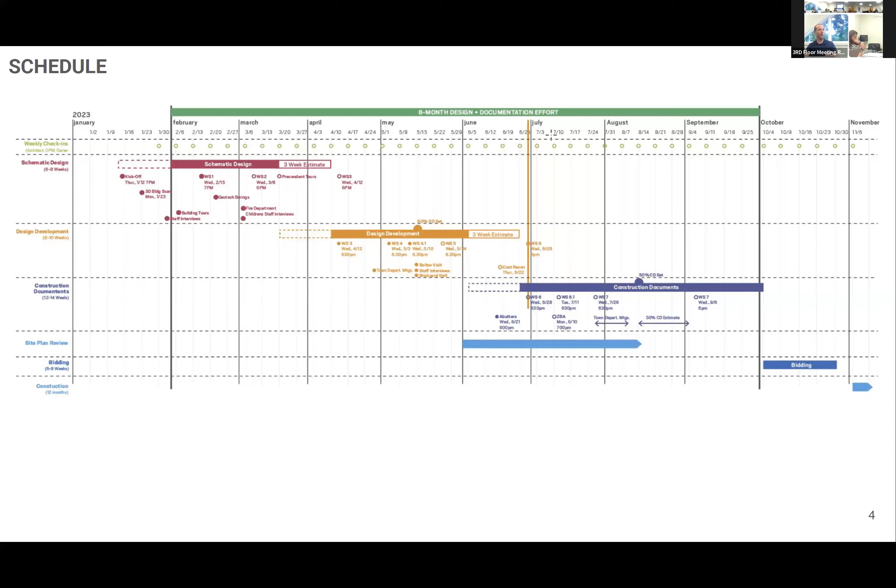And as you can see where that orange line is, the vertical line just at the end of June here, we're shifting gears into construction documents, which we have through September with a preparation for a bid package following that. So here's a bit more of a detailed view of what we're up to and what we have been up to.

So we just worked through that 3-week estimating period coming off of design development. Last Thursday, we had a reconciliation meeting. So the big difference in our process now is we have 2 cost estimators. We have the cost estimator that is part of the design team that did the SD estimate with us. But then John, representing the owner, the town has hired a third-party estimator. So now we have kind of 2 estimator sets of eyes looking at the project, and we went through the reconciliation process last Thursday to get all of them aligned on the estimated costs.

We also last week had a meeting with the abutters, property owners. Didn't get a huge showing, just a very nice couple from across Library Hill Road joined us in the library, but that meeting, it was broadcasted to a larger group of abutters. We only had a couple show up, but that was in preparation for our ZBA meeting that should say July 10th, not June 10th, but that's in a couple weeks, in a couple Mondays. We're going to be going in front of the Zoning Board of Appeals, which I'll talk about more here in a minute.

We are proposing an additional workshop to our CD process. That's workshop 6.1 that you see up there. We're proposing that for Wednesday, July 12th. And that is largely in response to this budget issue that we have to work through. Workshop 7 should already be on everybody's calendars. That's been on the books for a while.

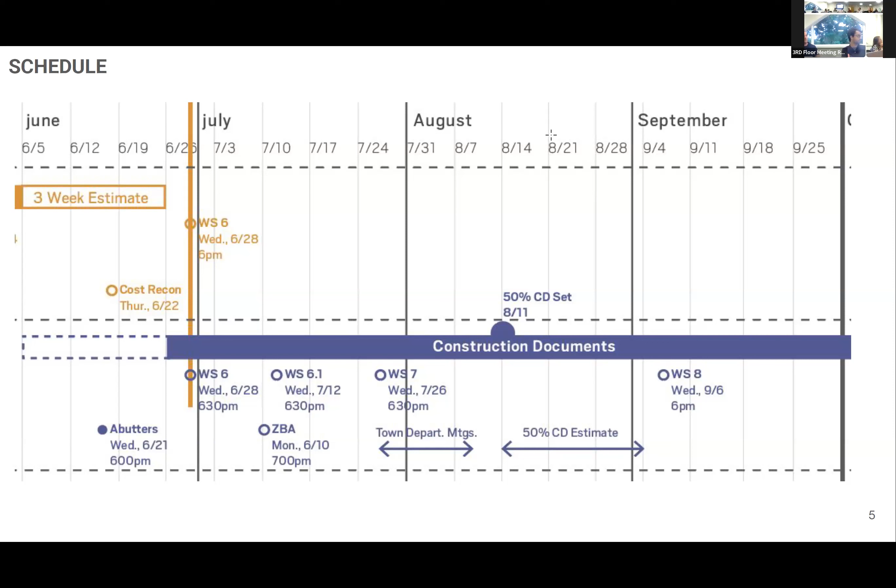We're going to be going back to the town departments to kind of review where we're at before we issue our last set of drawings for estimate August 11th. So then we'll go through one more estimating period to set us up for the final push of CDs. So that's our process in a nutshell, and we'll kind of revisit this at the end of the meeting to talk about it in a little bit more detail.

Just a quick summary of the ZBA application package that we pulled together. We submitted it about 2 weeks ago in preparation for this July 10th meeting. And the big takeaways are that we're applying for both a special permit because the current site and building are non-conforming to the zoning type of use. It's zoned as a residential part of town, and obviously it's not a residential building.

And the existing footprint of the building, which you see in those red dash lines, is not conforming with the setback requirements of the residential zoning district. So that's one part of what we're putting in front of the ZBA. And then the second part is that the addition that we're proposing is also non-conforming to setback requirements. So we need to seek a variance.

So what you see on screen, you can obviously see the sort of irregular shape of our site. The green lines indicate the setback requirements. One of the tricky things about the site is that we're on 3 roads, so there's 3 front yards, which have greater setbacks. And then the side yard is kind of on the top there. And then that bit in the middle that's kind of crosshatched, that's the actual buildable area of the site per the zoning requirements. The red outline is what's there now, and the blue line is what we're proposing.

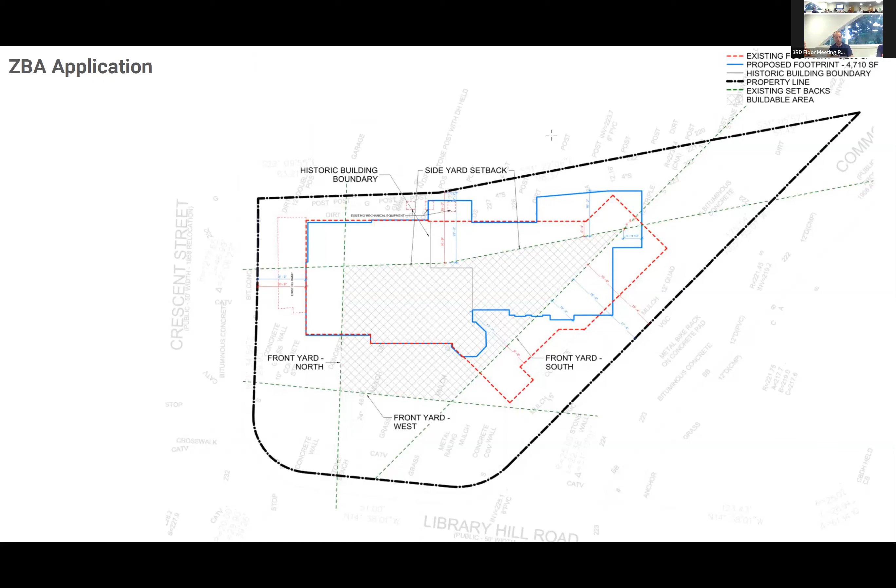So from there, I'll talk through a few slides to set up the exterior summary and updates, and then Audrey will walk through that in more detail, and Andrew's going to take us through the interior summary. And then I'll come back and talk about where we are from a cost perspective.

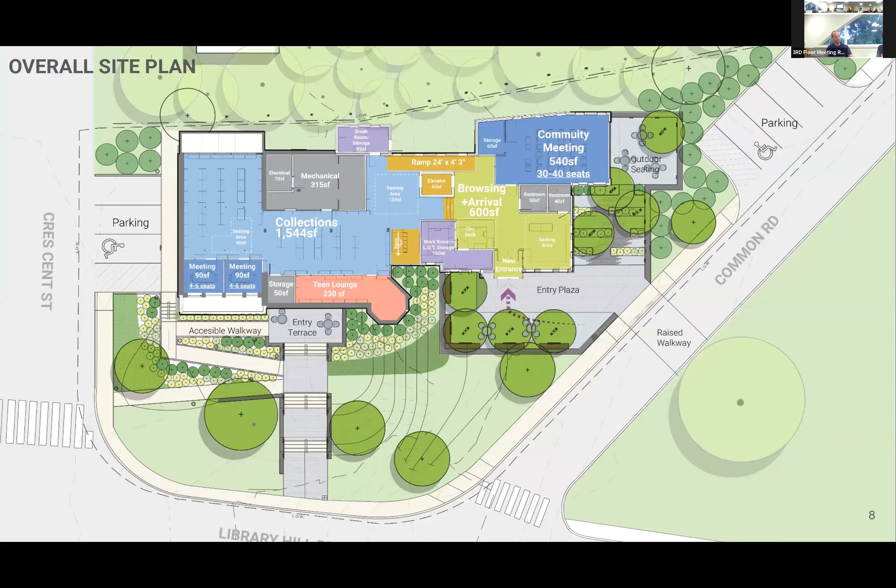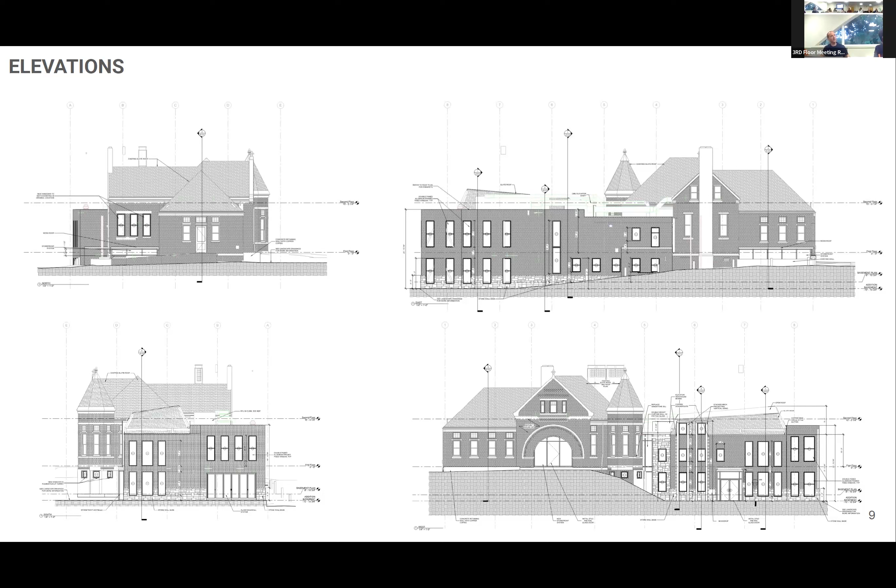So this should look pretty familiar, just an overall summary of the site and the first level design. This is exactly from the design development last workshop we had with you. Nothing of change here. Just for everybody's reference, there's a whole other side of our process where we're developing drawings for estimating and for the CD package ultimately and going to bid. This is a reflection of what those look like, but we did start to incorporate some modest updates that we'll talk about here in more detail.

Of course, you've seen this slide dozens of times, it probably feels like at this point, but it's always important to remember what it is we're working with and where we've been. And this is a summary of where we landed at DD in our last workshop 5. And this is what's reflected in the DD drawings that I just showed that were estimated.

So one thing that we want to talk about tonight is, we've reflected on this a lot internally, and we're very excited about where we landed and the combination of stone and masonry and the form of the roof. But we've talked a lot internally about the tone of the brick as it relates to Randall's brick, which I'll just click back. Randall has a very specific red tone brick itself, and we're very conscientious of that.

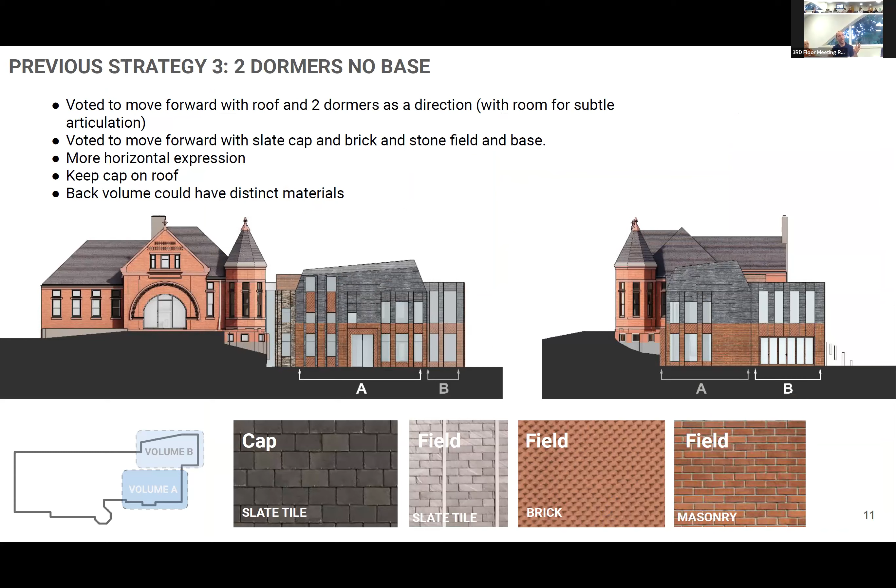And we want to be very strategic in that we don't want our proposed brick to feel too close to that red brick and perhaps clash with it in a way that wouldn't be appealing, or even worst case scenario look like a bad match, right? We're not going to be able to match that brick in any way, and we want our brick to be distinct from that. So we are proposing tonight a recommendation.

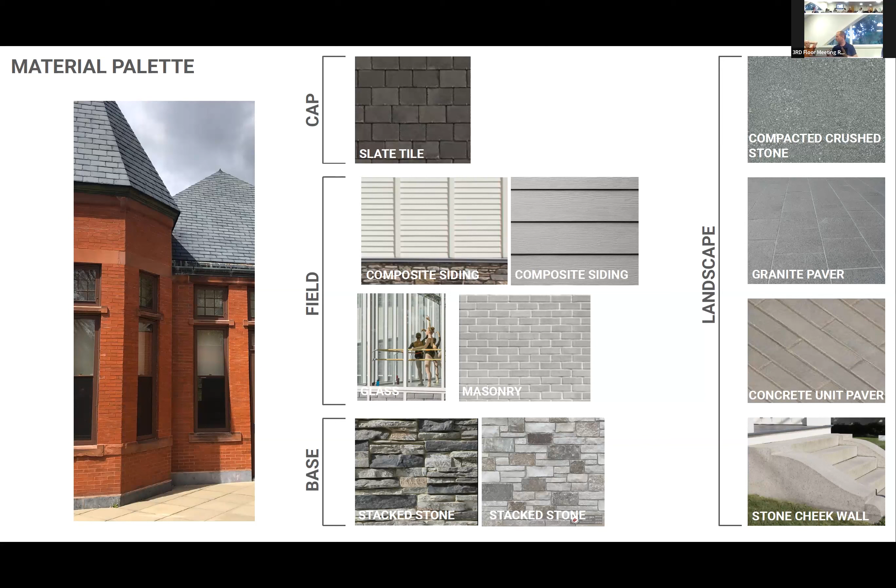It's a slight departure from where we were, but that's to consider a lighter toned gray brick as a distinct difference from the red. We've evaluated this a lot internally, and we think there's a better opportunity to complement Randall without being in the same family of reds.

Is it the color of your water bottle? Similar, just trying to get a sense. Similar, yeah, stay tuned, you'll see here in a moment.

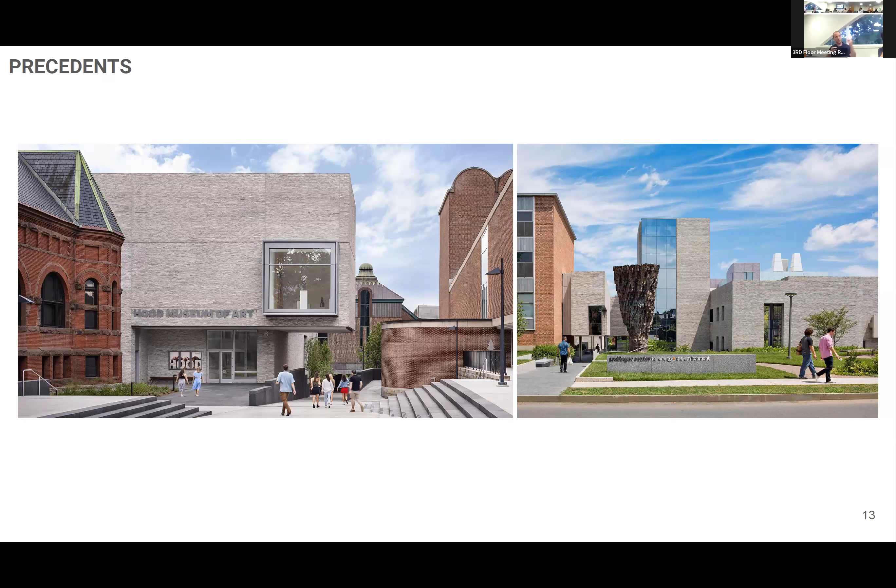The image on the left feels kind of familiar. It's up in Dartmouth, but that's a Richardsonian building on the left. It's a little bit more rusticated in its detailing than Randall. There's a bit more to it in terms of masonry variation and the amount of sandstone, but it's very much in character with Randall and of that era. And then there's a new addition to it in that gray brick.

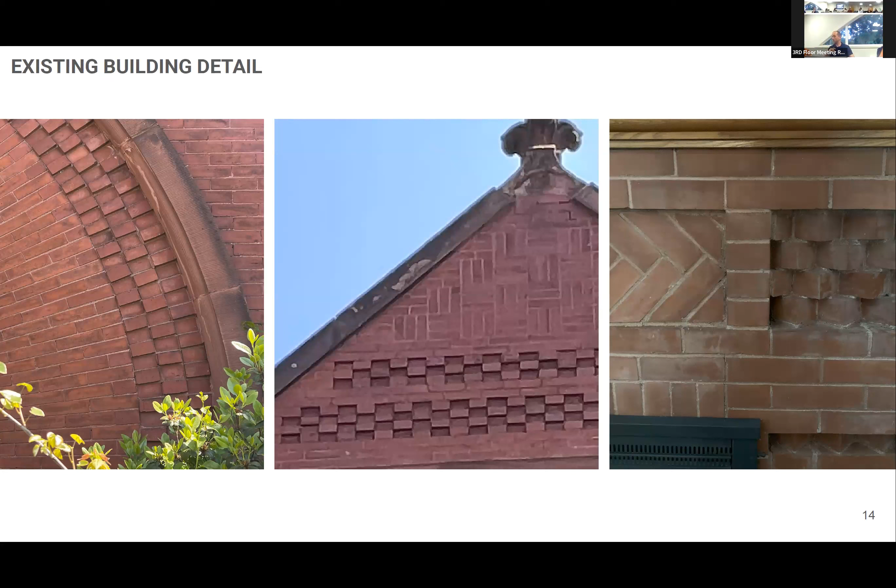We also have looked a lot more critically at Randall itself and its detailing. If you're standing far away and not looking at the building that critically, you might overlook the types of brick coursing that exist. But it's interesting. There's these little protruding brick moments. There's a basket weave moment that you see up at the top of the gable there in that middle photo. And then even inside with the fireplace, there's different types of brick coursing that was added. So we're intrigued with that and want to incorporate that into our thinking.

And so off of that, we really have been thinking more of how we can play with the detailing of the brick. And so here are a few precedents. I think you might have seen them before, of just different patterns and detailing that we could incorporate into the building to add a little bit more texture to the exterior.

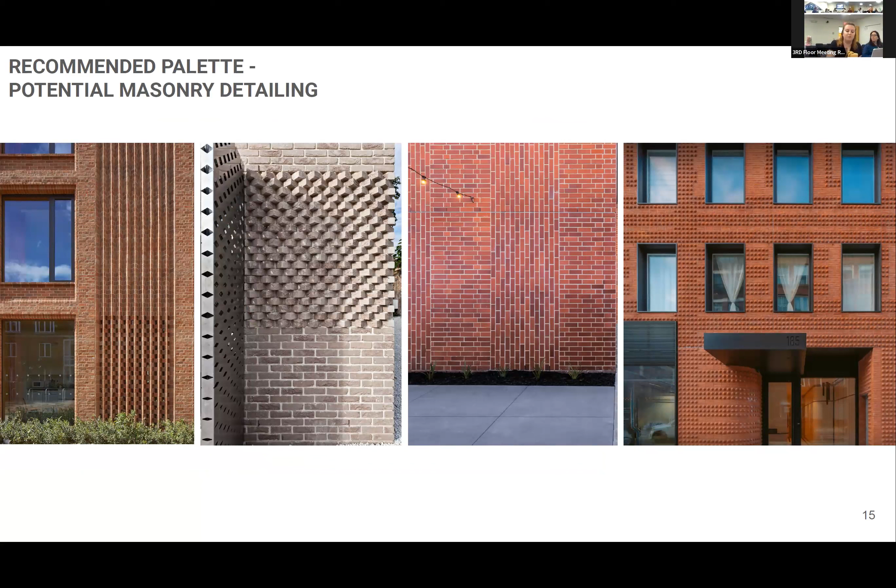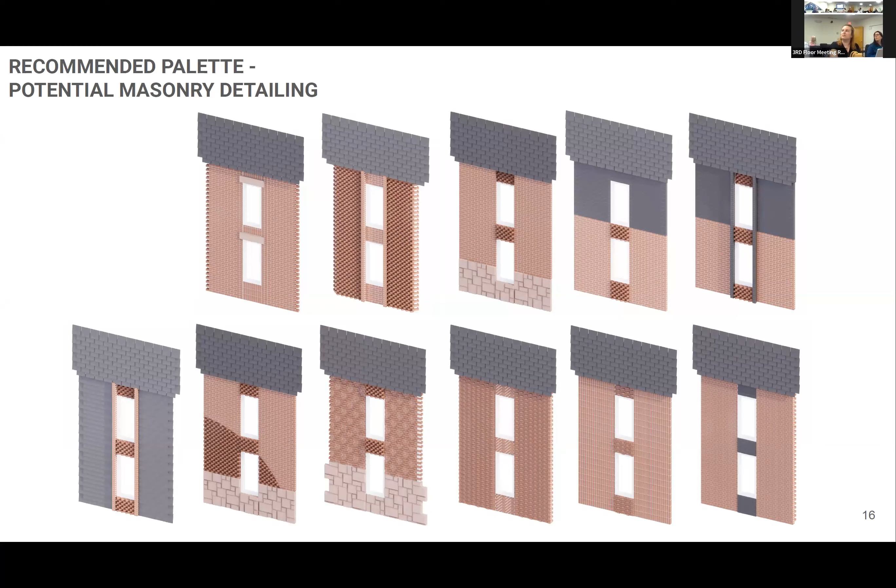And then these are a bunch of studies that we had done previously to look at all of these different patterns and how they can work together with the different materials that we're considering for the exterior. And so this is kind of where we've settled at the moment. These are snippets off of the overall elevations that we'll show in a few slides.

But we're really looking at how the different materials start to connect together and where we start to use those to create a little bit more impact on the vertical rhythm. And so it's sort of subtle, but you're starting to see it between the windows, in the vertical bands, just the opportunity that instead of a standard running bond of brick, we may introduce this sort of protruding detail to get a little bit more shadow, or this herringbone pattern, sort of riffing off what exists in Randall now and presenting it in the new composition. And all of these details are ones that we found within the original building, every single one.

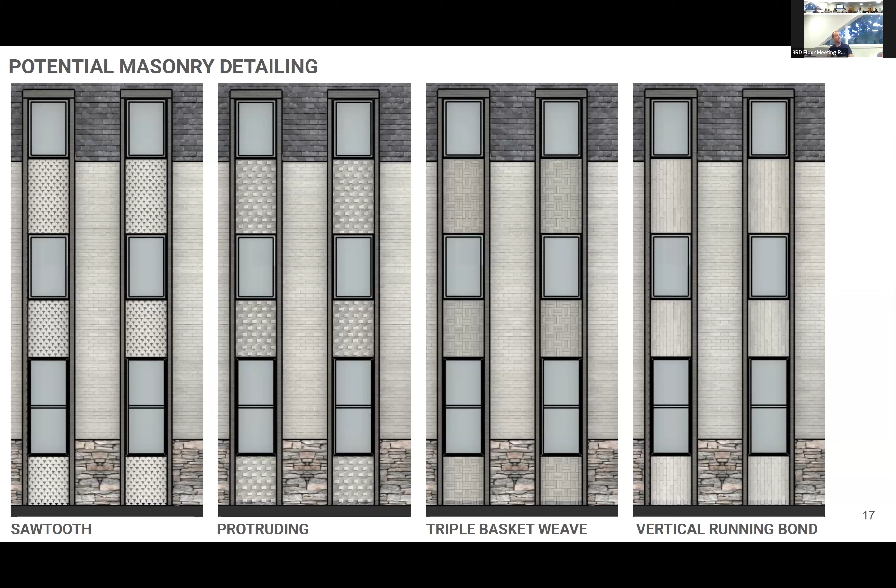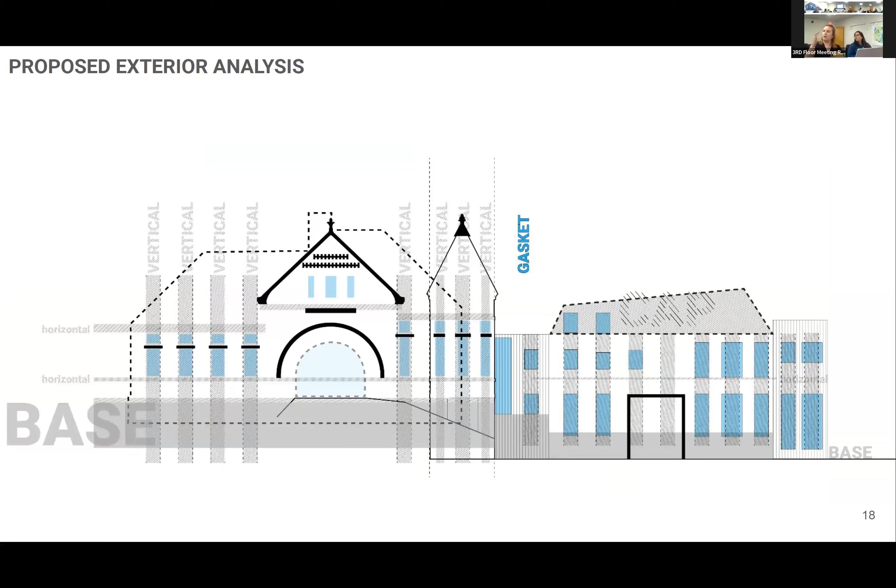And so this is just our updated exterior analysis that's really starting to show what the vertical rhythm is and how we're following off of the existing building. And then these are the updated elevations. Some of the things that we really try to focus on is creating a separation between the community room volume, so volume B, and as it is pushed back, we wanted to find a way to further that change. So we're looking at a change in tone and material as well. Whereas the front volume A will be more masonry to talk with the existing building, the back could be some form of wood or composite siding.

And just to chime in there. Obviously this is different than where we landed on DD, but the idea of the stone base and the slate roof are consistent, and we've just really looked at that field and where the transition is from stone to masonry and then to slate differently, and are introducing that lighter tone. And it's our opinion and our recommendation that this is much more complementary to the original building than trying to introduce a red tone that may feel like it's competing with it and clashing with it.

And it is in reaction to some things that we heard, because in the DD scheme, we had some of the slate turning down the vertical face, and some people expressed that that might feel a little too dark, a little too heavy. So we were reacting to that. And then there were other comments about, can that secondary volume, the community room volume, feel distinct from the primary volume, in character of course, but feel different.

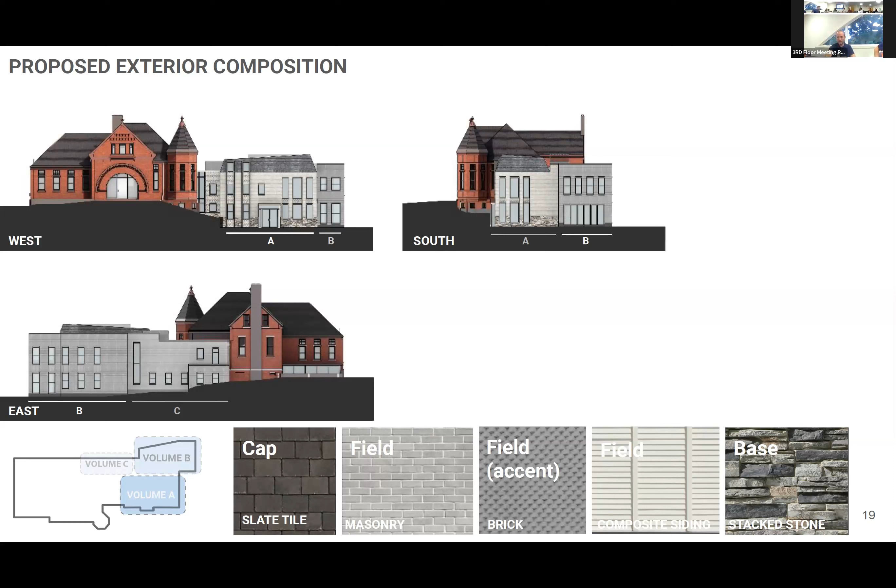So that's why, as Audrey just said, we're thinking about that in a different cladding, and we are, with our estimators' input, looking at more economical solutions for that volume. It's going to be coming back into the conversation shortly when we start talking about cost. But we need to find opportunities to manage costs. So thinking about cladding that secondary volume differently is part of our thinking. So we'll click through these in a little bit more detail for you guys, so you can see them bigger.

But here you can see the west elevation. And another comment that we're reacting to, I think it might have been you, Richard, or Andrew. In some of our DD schemes at our last workshop, there were comments that maybe we're trying to do too much, and the elevations felt a little too busy. So we tried to simplify that. The stone base has come down and is simpler. The hat, if you will, of the slate roof is now distinct from the building itself, and overall we've really tried to streamline the composition.

So you can see in this image where those details are coming out a little bit. They're expressing the horizontality within that double height space a bit more to break up the verticality, which is another comment we heard. And we're carrying that detail over to in between all of the windows where they are expressed in a uniform vertical manner. And then that carries over into the gasket a little bit as well. And that detail swells a little bit, which I find very nice. And as we go around the different sides of the building, we're really trying to keep the same language that we've started in the west face, the front face.

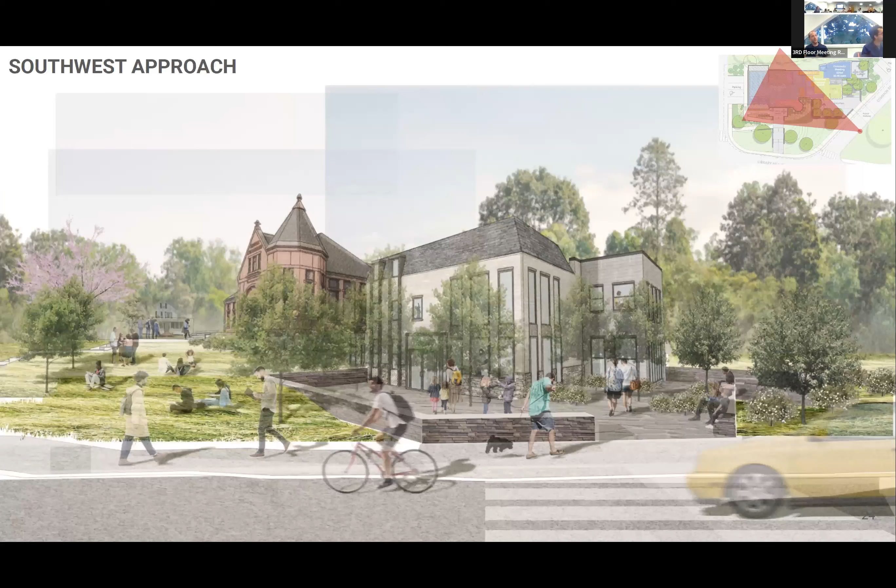So going to 3D here, volumetrically, in terms of the window composition, it should feel exactly the way it was at DD. We are thinking about massaging the roof a little bit to try to make that as economical as we can. We'll be talking about that in a minute, but otherwise it should feel very familiar. And we wanted to show that previous image, a little bit zoomed out, to help locate everybody. That box on the left is the old firehouse building, and that box behind the library is the house that we had been discussing in the previous meeting. We wanted to get that context in there, but then zoom in. So you're able to really see the difference between the volumes here. And this is just a look at those elevations in perspective.

I have some hands. I have to control this for a minute. So Morgan, raise your hand. Morgan, do you have something you'd like to say? Yeah, I just have a question, maybe this is a silly question. Can you hear me? Go ahead, Morgan. Let's see if we can hear you. Hang on one second. I can hear you, Morgan. I don't think they can hear you in here. There you go. Better? Yeah, go ahead. Now we can hear you.

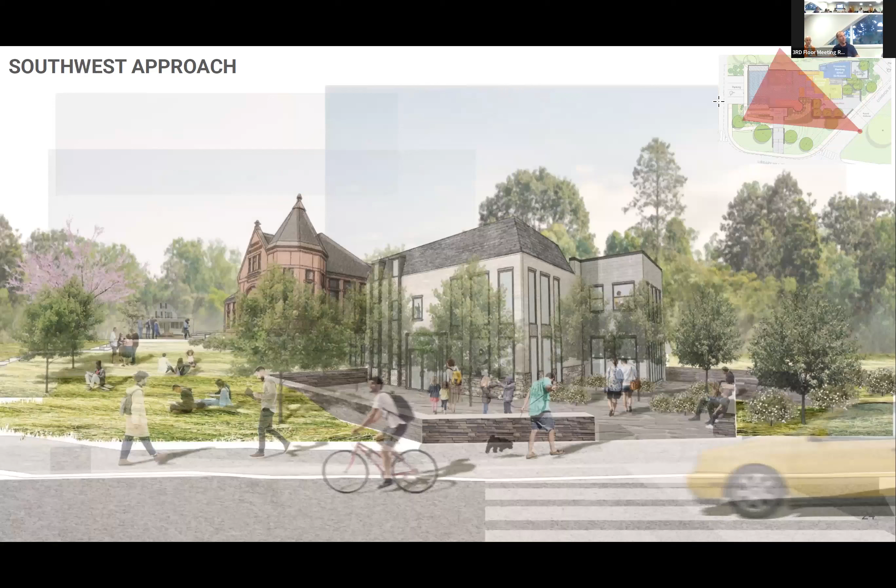So just to click back and forth, we're much more over to the right now, focused more directly at the community room, and then the back abutting property line. At the portion of the dumpsters, if you will. Yeah, you're kind of standing where the dumpsters are now. Yep.

And do you plan to have any of these, and we can talk about this, but for the ZBA, will you be showing some of these graphics? We can, I think let's talk about it at the end of the meeting about what we feel comfortable with and what we think is appropriate, but we totally can, if that helps paint the picture.

You're also seeing here very far in the distance on the right-hand side that little addition component that is our thorn in our side, trying to get that additional mechanical space we need for the sprinkler system. We're trying to eliminate it and make it all fit inside, but we're really struggling with that.

And that is reflected in the footprint diagrams. I didn't point it out, but in terms of what's been submitted to the ZBA, that little bump out is represented in what's been shared. So they're aware of that.

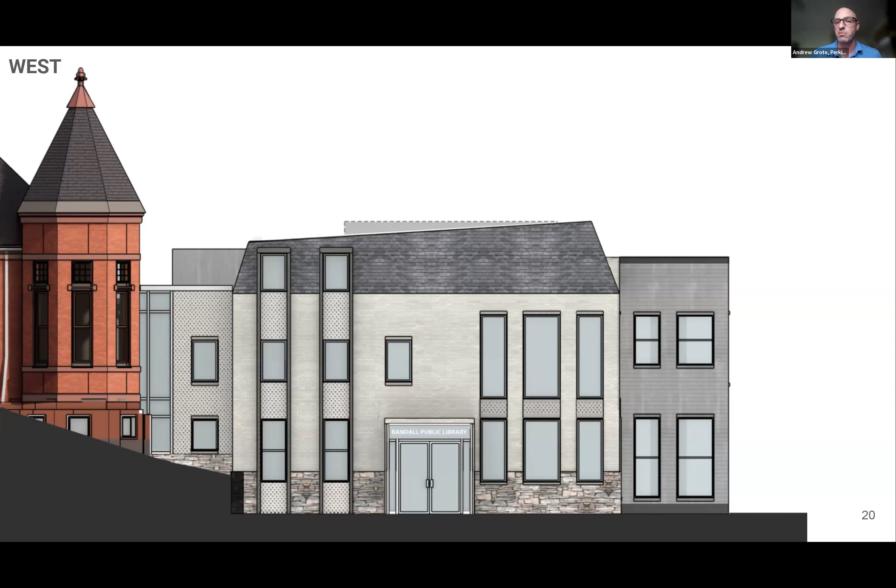I don't think it looks too big. I think it looks right. I think it's well proportioned. I agree that that one window there is a little lonely. I'm sure you guys probably feel the same. So it might be a matter of zooming in a little bit even more about showing the palette of material right next to each other. I think some of your precedents show really good textures in there, and it's just tough to match.

Could you turn to the next slide? You talked about massaging the roof. There's a really funky thing happening with the parapet as it transitions to the next building, where the sloped roof stops and there's a little bump up of that. And is that necessary, or is that something you're working on?

It's something we intend to talk about in a little bit as a value management strategy. Frankly, we were hoping to get additional height in the children's room, but we think we can simplify that a lot, but also structurally. That'll benefit both the composition, but also the cost. Okay, so it's something you're still working on?

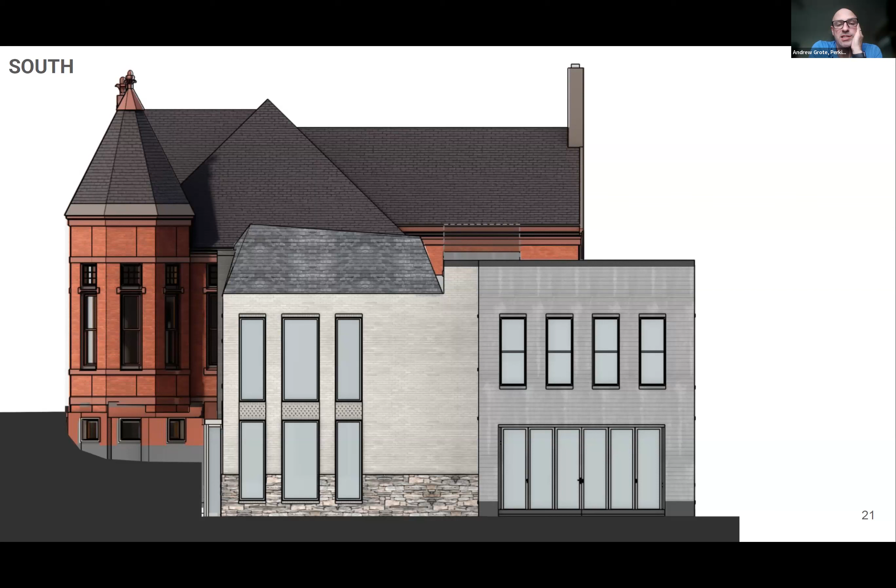Yeah, I mean, long way of me saying we're going to be proposing, Andrew, to lower that roof so that it's where the sloped roof stops, if that makes sense. We'll talk about it more later. Okay. And just one more, next slide.

On the left-hand side, that little line, that's where the building deflects, right? So it's a slight. Yes. Picks back a little bit. Good angle. Yep. Okay. I mean, I think this is nice and simple. It defers to the hierarchy of the entrance side. I like the little details you've got connecting the windows on the left. So there's a lot of possibility for play in the brick there.

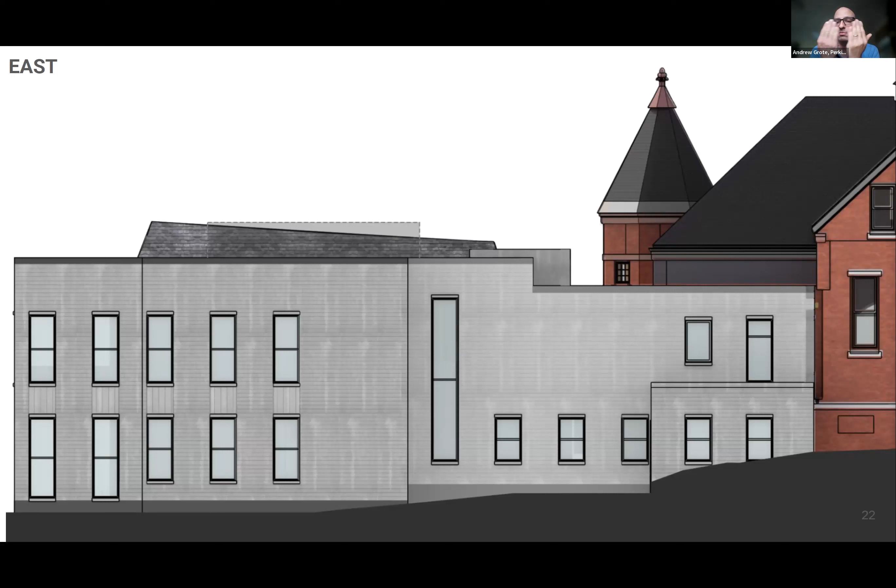So in general, I like the gray. I think having some really close-up samples of it, like next to the brick, and just some details will help fill in the imagination for folks on perspectives and renderings. Okay, thank you, Andrew. Yep. Morgan.

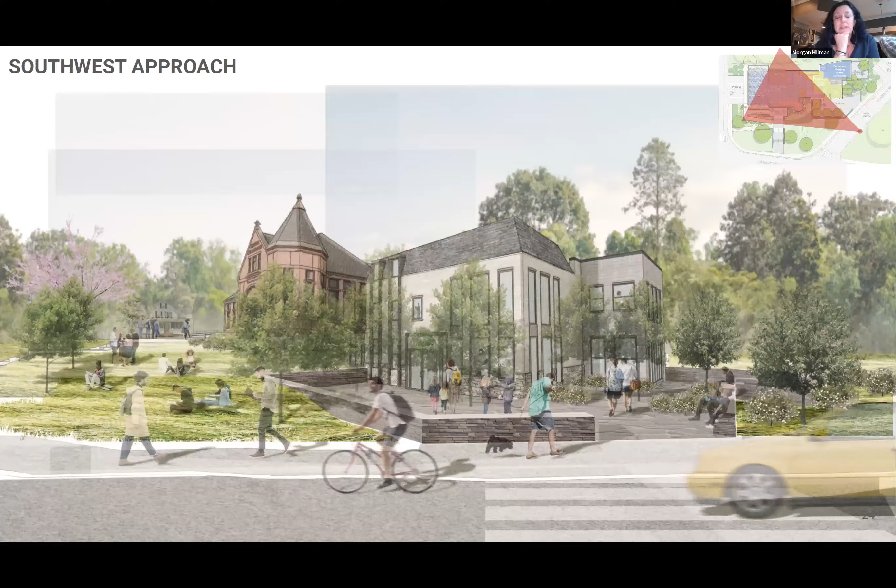I just wanted to say I also like the gray a lot. Whatever version of gray we end up with, I think trying to match the brick and being too matchy or being too clashy is just so likely to happen that I really appreciate being able to go a different direction and tie it in. Something we've seen, I think it was in the Somerville one, but I'm sure in lots of places, that the stone base where it kind of has all the different colors that pull together, it looks like in a lot of these photos, you're trying to get some that have some type of a red brick coloring to it, which is really beautiful. And I think that's a great way of tying it in.

Yeah, it was the Somerville Library that we commented that there were all these different types of materials, but it kind of brought it in and matched the stone like that. So maybe something to do when you're looking for whatever colors we're going to be using for other materials is try to find that stone first, which I think is really beautiful and striking and probably appealing for a lot of people, and then pull the colors from it, whether it's a darker gray, lighter gray, beige or gray, whatever, but it'll look like it's all very well tied in. So I think it's really, really nice.

Although that one window does feel like, I don't know if you've seen the Instagram, please hate these things that are like, it either needs to have two or be in the center. Thanks, Morgan. Thank you. First of all, I like that window. I like it's one of the few elements that doesn't have a twin, or it's slightly off the line of symmetry. And I think I liked it. I didn't even notice it before, but when Melissa pointed it out, yeah.

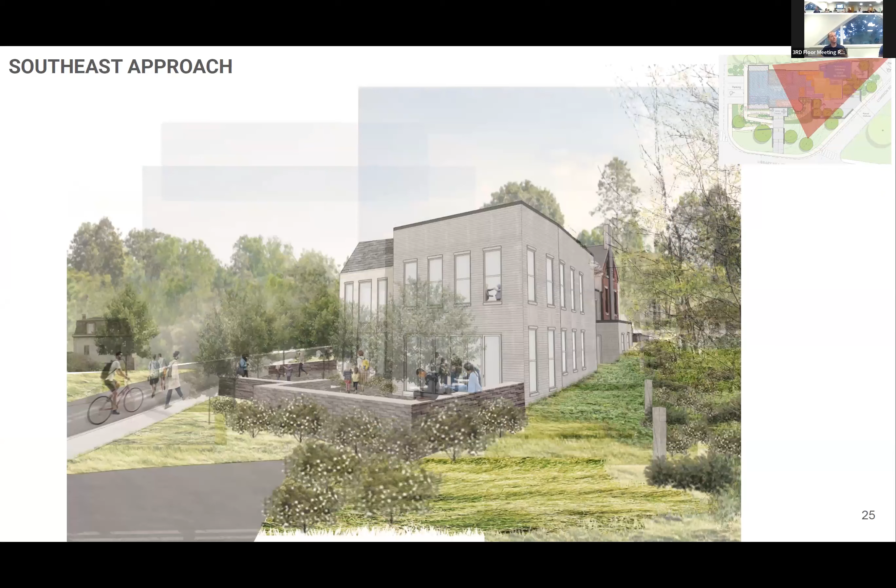Even in the photograph you showed of the Hood, you could see it. Yeah, at the museum. That's the Hood Museum at Dartmouth. Yes, you're correct. So that's another thing we'll be exploring, is there a combo there rather than this kind of monolithic single color that just happens in the Photoshop diagramming process.

One more question. Did you give up on the idea of trying to work an arch in some way? We did look at it more after that. I think that was two workshops ago, and we had explored it in the entry, but we just didn't feel confident in it or that it would be successful. At times it felt a little gimmicky. That thing is so powerful in the original building, such a feature component of that composition, that it just didn't quite feel right.

We even looked at it, I don't know that we showed you, at the tops of the skinnier windows, like arched tops to the windows, and that didn't feel quite right. So we did explore it. Nothing really hit home. Can we shift gears to keep moving? Yes.

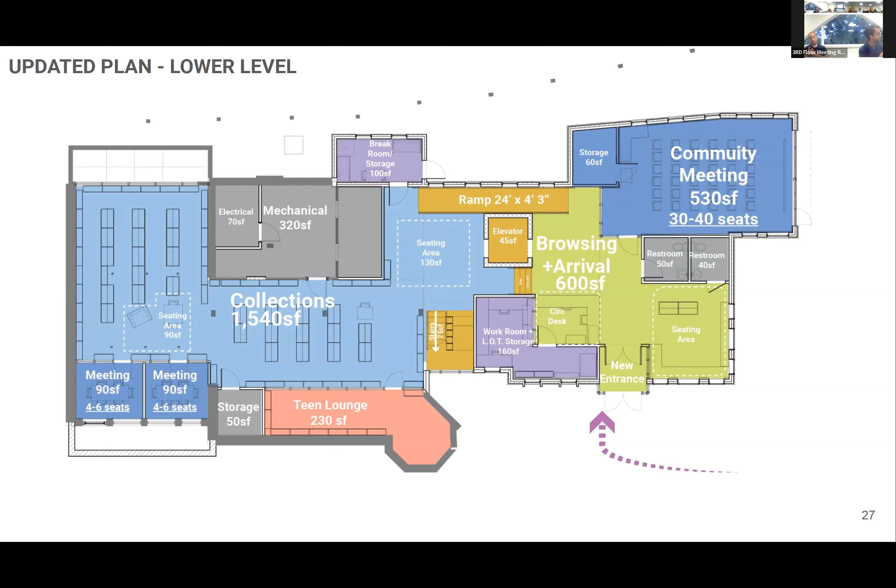But what we've added here and what we got estimated was the materials and the flooring. We'll go into overall palettes for these spaces in a moment. It's kind of a graphic issue because of the TV, but we have stone tiling at the entrance lobby on that open corner. And we have a resilient flooring in the flex room, kind of like a rubber tile floor that can take wear and tear. We're proposing movable furniture in there, so you want it to really last.

In that center zone, we actually have a cork floor drawn here. We have a wood floor estimated. They're roughly the same; cork will be a little quieter. It's a little more of a unique material that we've used lately and we really like. And then just carpet tiling, pretty simple, with a single accent color in the stack area.

Just to expand on that a little more, there's a million variations on tone of brick, and a million variations on carpet tiles and what color they are, and we're not there yet on what we're proposing specifically. We imagine there's a field color that's one tone, and then a perimeter that bleeds into the meeting rooms and the teen room that's another color. But we'll get into more detail on all of those with all of you and provide options for discussion.

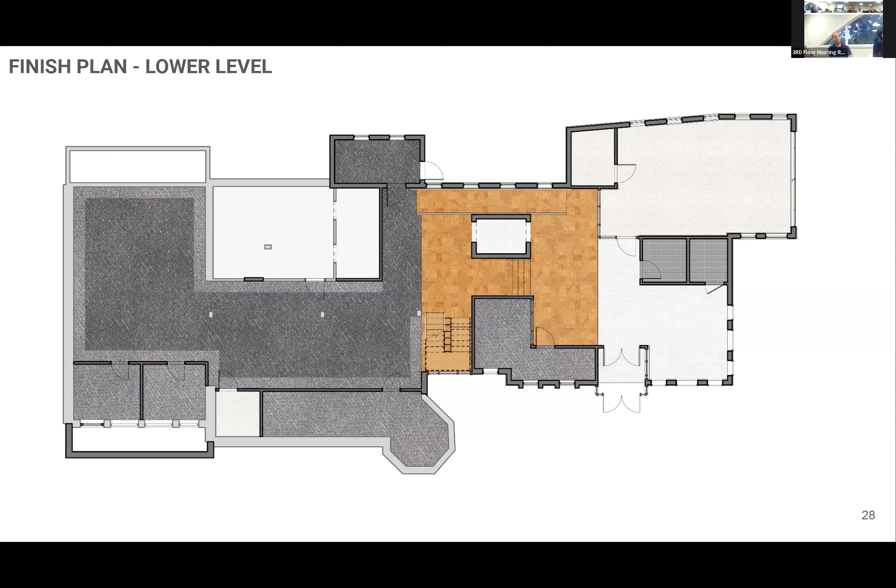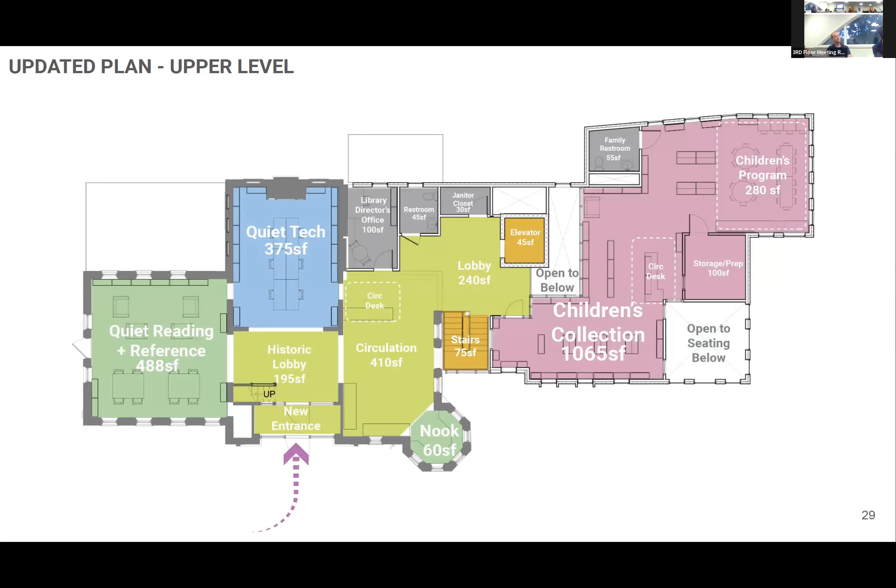The first floor main level, mostly the same. Children's library, children's collections, taking up that same amount of footprint. We've discussed the library director's office expanding and moving down to get the restroom in there and that wall opening up. And we'll see that in some perspectives soon.

Similar diagram here, children's library, where we'll be proposing a more colorful carpet tile accent design to make that space quite a bit more exciting. And that lobby will be the same flooring material as the lobby below, and that whole procession goes up through the lobbies and puts you in both buildings.

And then that flooring in the historic building is going to remain the same. That flooring, we've been looking at that a lot, and there's an enormous range of color within that floor, and it's in really good shape as well. So that was actually one reason why we started looking at cork rather than wood, is because it's the same thing as the brick outside, where, to use Andrew's analogy, we don't want to wear denim jeans and a denim shirt. And cork actually has more of a variation in its single tile texture. So it's a nice complement to that very unique flooring.

So I'm just gonna go through a bunch of these palette slides. It's just single images of each of the materials, and you'll see some white boxes too that mostly represent white paint. Just gives you an overall understanding of these spaces without fully rendering them out.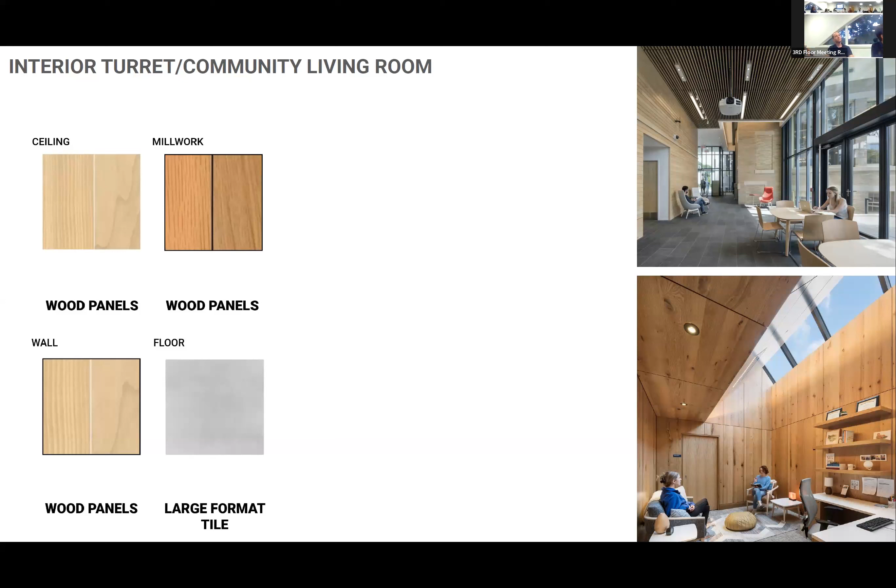Can I just ask a question about that finish in that turret where there will be teenagers who are prone to doing things when people aren't looking? Like writing on walls. Is it fairly resilient to inundation by pens and Sharpies and scratching your initials into it and that sort of thing? Let's clarify. I think, Lisa, when we say interior turret, we're meaning the new lobby space, right? Yeah. Good question. When we say interior turret, we're referring to the double height entry lobby space, which is sort of our interpretation of the turret in the double height space. So it's not the existing turret that will become the teen space. Oh, okay. Got it. I see. Good question.

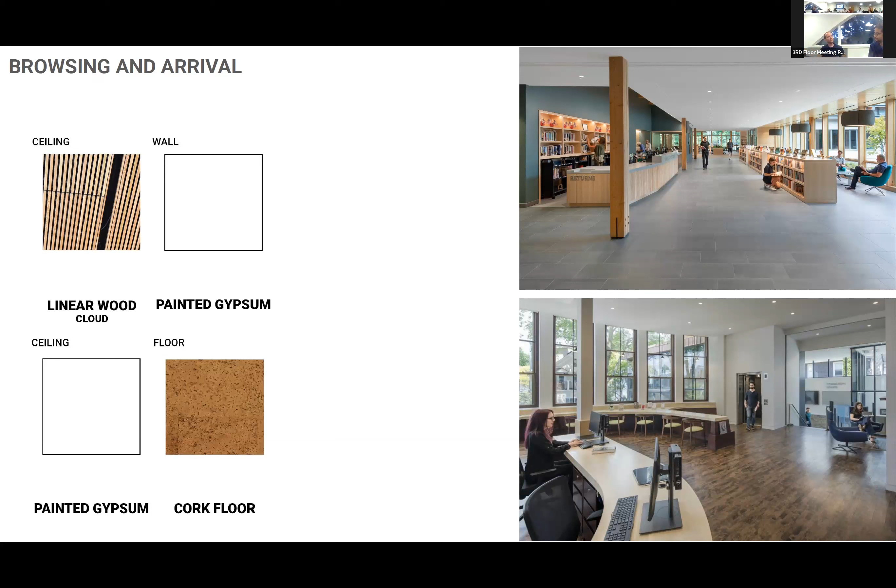The browsing and arrival space, which is kind of directly adjacent to that interior turret space. We have a wood ceiling and a cork floor, and then painted gypsum ceilings and walls. And that's kind of what you'll see in a lot of these. But of course not in this one, the community flex space. We think of this space as a bit more of a jewel of this building. It does have that resilient floor, resilient tiling, which has a million choices to it, a million field colors, and a million accent colors. But we have a felt ceiling in here, which will help a lot with acoustics. And it's a really nice product that we have there in the top left, and it's actually what we used at West Branch for a similar space.

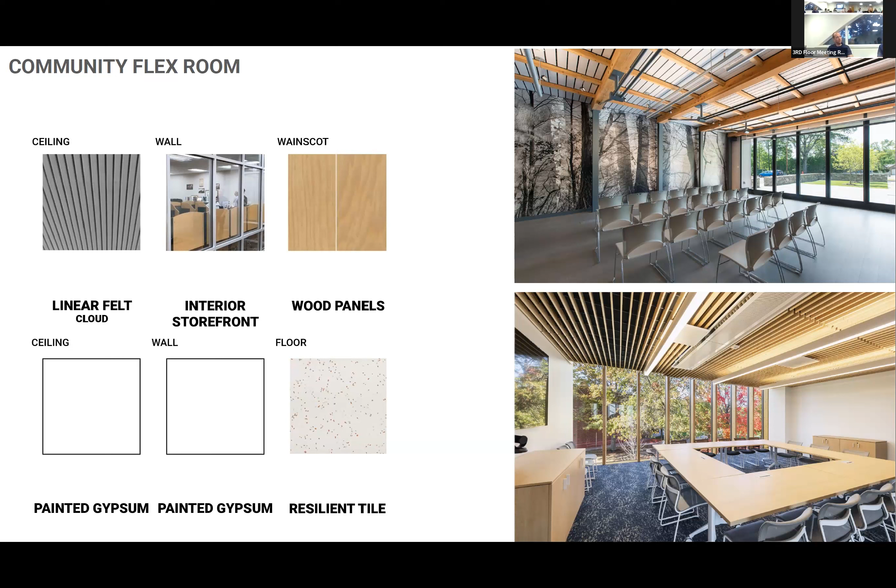And we have glass, which kind of extends out into the landscape, similar to that top right image, and wood wainscoting, which is similar to what is in the historic building. There's wainscoting around all of those spaces. We wouldn't directly copy any of those details, but we consider those dimensions and kind of riff off of those.

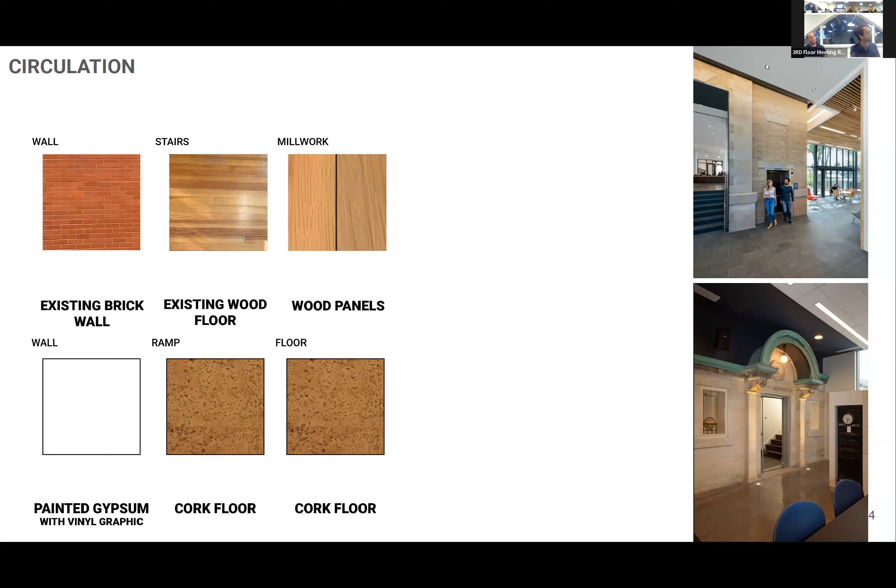The circulation space, which is where that cork floor was. Again, that's kind of where the cork would be. There would also be wood millwork, and it'd be close to the original wood, and we're proposing wood stair treads as well. And then also the existing brick wall will be heavily expressed in that circulation zone. And a vinyl graphic, which you'll see here is just expressed as a green. We had a bunch of different things plugged in there, actual images, but we decided to not show that. But we're considering expressing this wall or these two walls as a pretty large vinyl graphic.

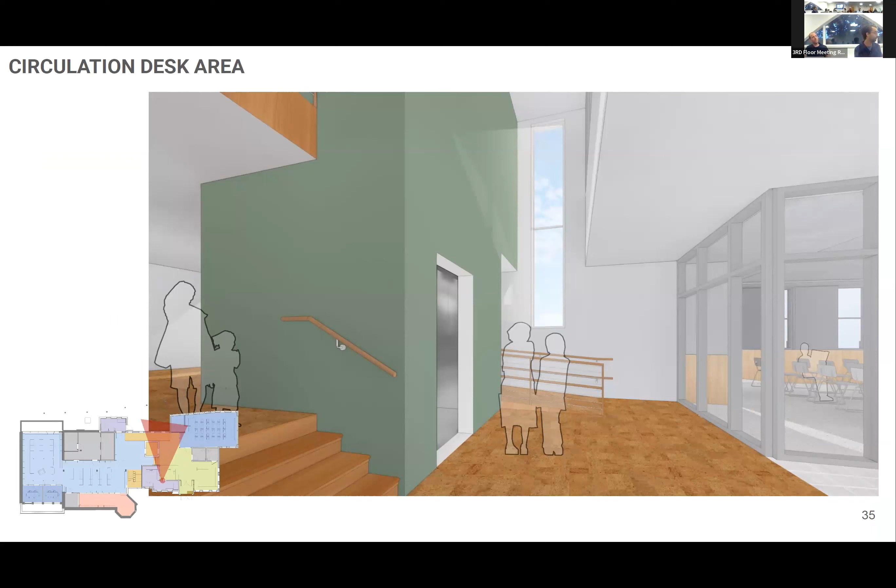It's basically like putting printed wallpaper, for lack of a better way to describe it. It's another design exercise that we hope to get to, but picking up on something of the town. We've got some sampling images here, either a historic image or an orchard or something, and then turning that into a wall treatment as sort of an accent within the building. And it's something that we've done on a lot of buildings that especially have a significant wall space. It's really helpful, and it gives you another stopping point in the building to look at, like why people like looking at big maps, and you can really express the town of Stowe with a really big map right there. Things like that. There's a few images we've kind of fallen in love with, like that middle right one that we'd consider looking at.

Here's the view up the stair, looking at the turret in the background. You can see the cork floor and two different wood tones in the millwork. So that's another thing that we're exploring, whether it's a single type of wood or two. Probably not going to do more than two. It gets really heavy, especially in a small building like this.

But we really like this view. Something we may not have really expressed to you all, but we've gotten excited about, is this kind of light sculptural moment within the staircase. That's really a series of shelving that goes all the way up. Could hold little artifacts or books or whatever.

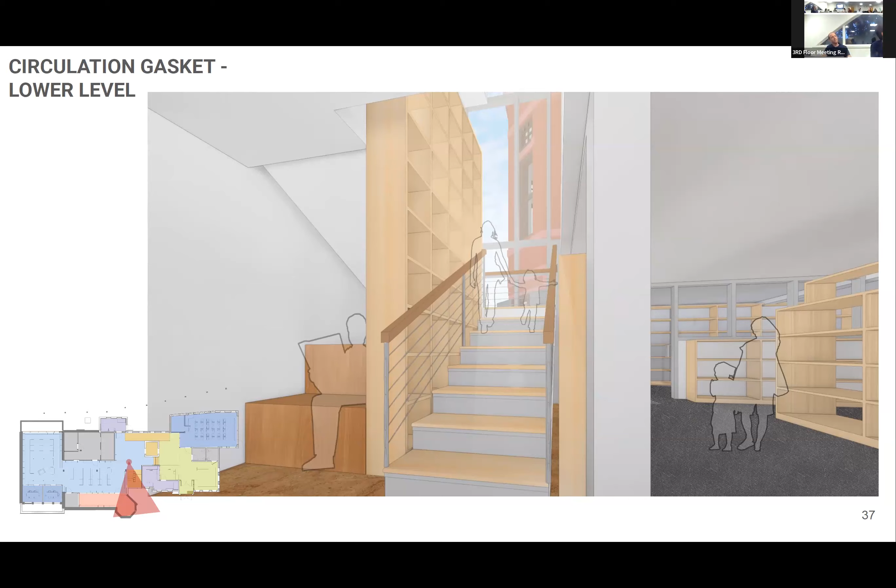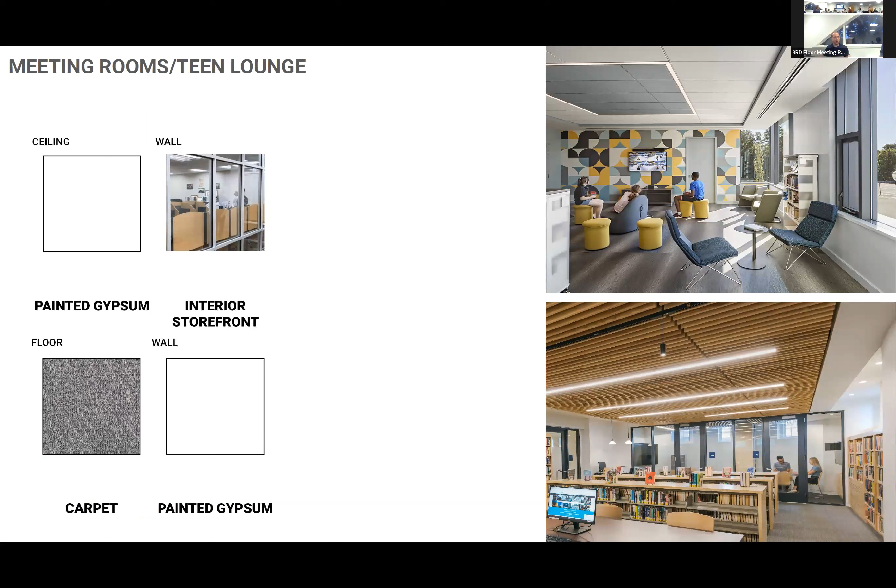The meeting rooms have a light touch. The accent carpet of the collection space, we consider bringing into that just to represent those rooms, and then the rest is glass and white. They're small spaces. We want to make sure that they don't appear too dark. We want to try and make them as light as possible without being blinding. Collections is kind of a similar feeling to that, but it has the field and the accent carpet.

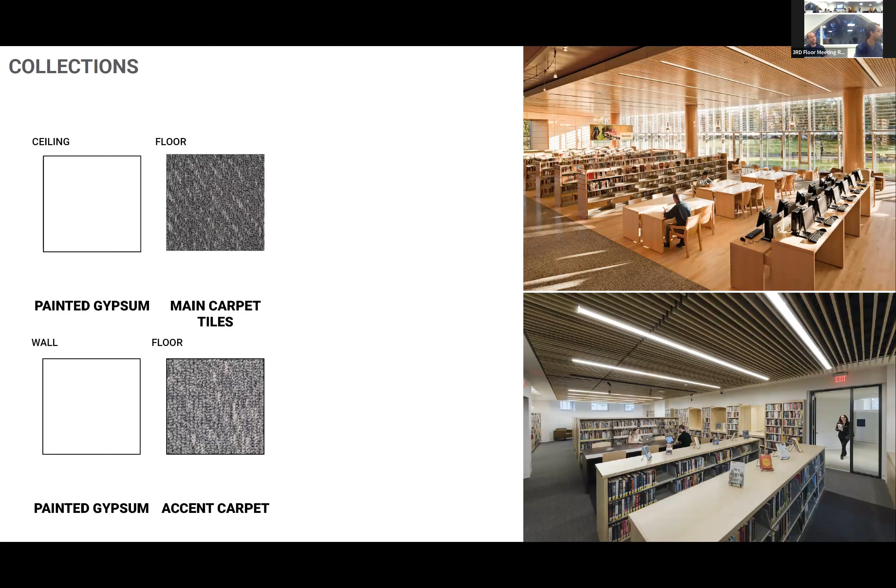Oh, now you're killing me. We'll get a measurement of that box next time.

Those were all the lower level spaces. The upper level, we just finished this image up and we really love it. It's really nice. This view, if you look in the little bottom left corner for a moment, this is standing roughly where the restrooms are on the main floor, and looking out towards the door to the patio, if that helps at all. So the current upper floor.

So we are proposing to make the opening between the buildings bigger so that it's not just a single doorway. That is one comment that we always keep in the back of our mind, that these buildings need to feel like one building, not two. And then you can see the new staircase in the background and the children's library right behind that. So you can see quite a bit farther through this space, and then you can see the existing floor and the existing wainscoting, which is that wood that goes up roughly 3.5 feet.

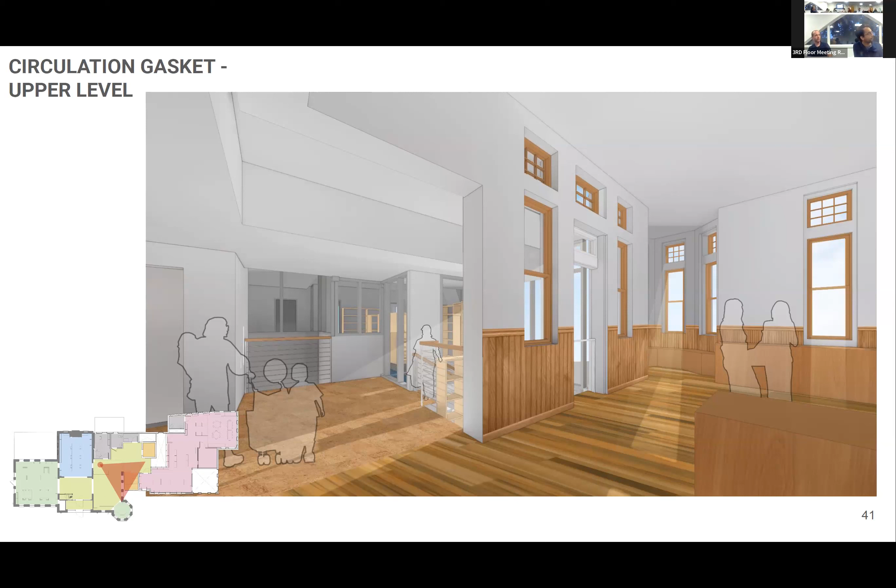For the children's space, like I said, we look to have a more colorful accent color, potentially a more colorful field color for the floor, as you can see in the two images on the right, and a wood ceiling in some parts of it, but not covering the entirety of the space. It would be a gyp ceiling in probably the majority of the space.

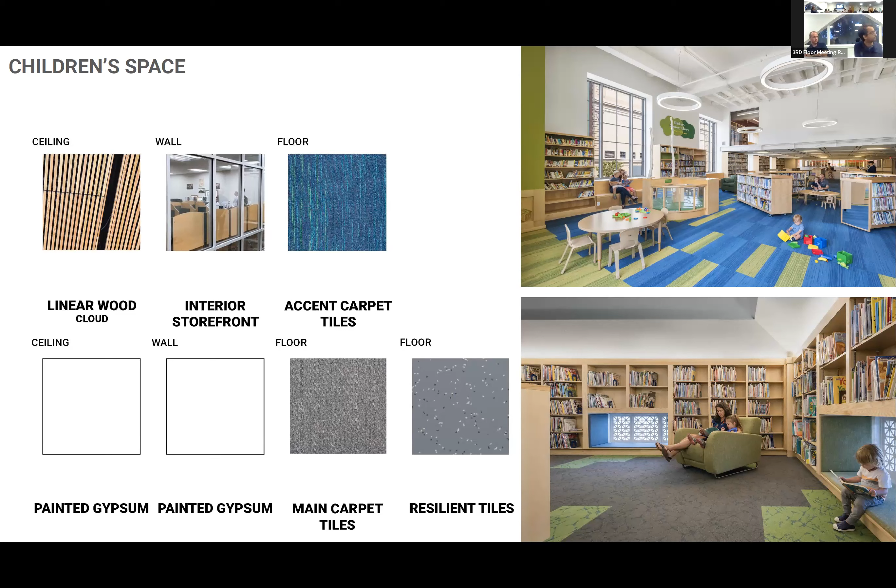This is a similar view to what we showed before, but you can see that concept for the accent of the floor, and also two tones of millwork here. But I just want to point out that the farthest left window on that back wall is that standalone window. It's there because on the interior it matches with the others. It just doesn't on the exterior, but it would still be a nook for kids to sit in. So, in a more poetic way, there'd be somebody sitting in that single window. So that's why that window is still in the design.

Are the other windows also nooks? Yeah, definitely.

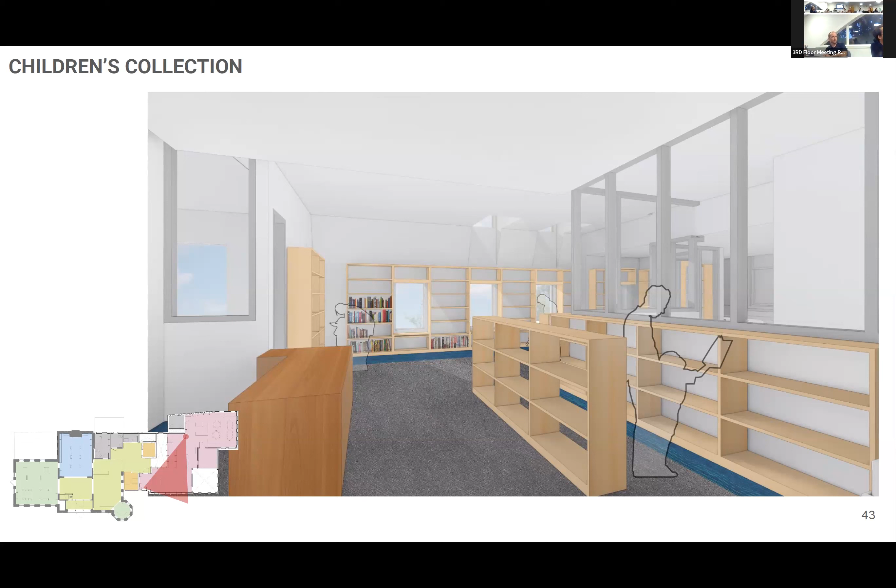And the historic rooms, we looked at that interior perspective of, but we're looking to really maintain these materials. They're in really good shape. We've gotten a much better look at them now, and they're in even better shape than we anticipated. So those kind of natural colors will remain very similar. We're considering adding a lighter tone to the paints, like white in that top right image.

There's a whole science to white, just like there is to gray. So we'd look at a kind of more antique white color, and probably different tones of white, but it would bring out the natural colors and textures of the wood better than the color there now. And we'd probably look to sand down the walls too. They're not really in the best shape. It doesn't seem like that paint was applied as professionally as it could have.

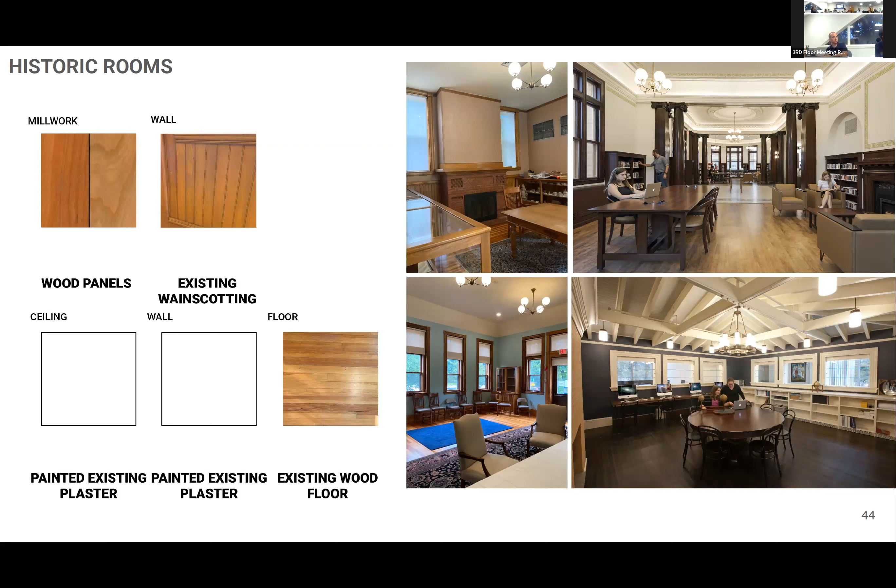So just the compilation of those interior images here. I think that's the last of. Yeah, this is the last of the interior. So do you guys have any comments? So the upper right image there, that green area is the area you're talking about having the graphic wallpaper. And that's the elevator shaft, right? Okay, I like that. So will it be something you can see from all four sides?

I'm thinking yes, but as you've probably noticed with design, the more detailed you get, you just continue to get into further iterations of what something could be. That's a whole investigation from a design perspective. And we'd obviously have to talk with all of you and probably others about what the right images are and go through that whole process. But yes, we're hoping to accent that elevator as a key element in the building through graphic.

When you look at all the different flooring, what kind of maintenance are you looking at for the different products? With resilient tile, I'd like to get a no wax tile. Okay, that's good to know. Because with stripping floors, we have no way to really dump it when we strip it. Yep. Great comment, and something we'll think about to find the right product that works for all of you. I think a lot of places are going that way too, thinking environmentally, not having to strip and wax.

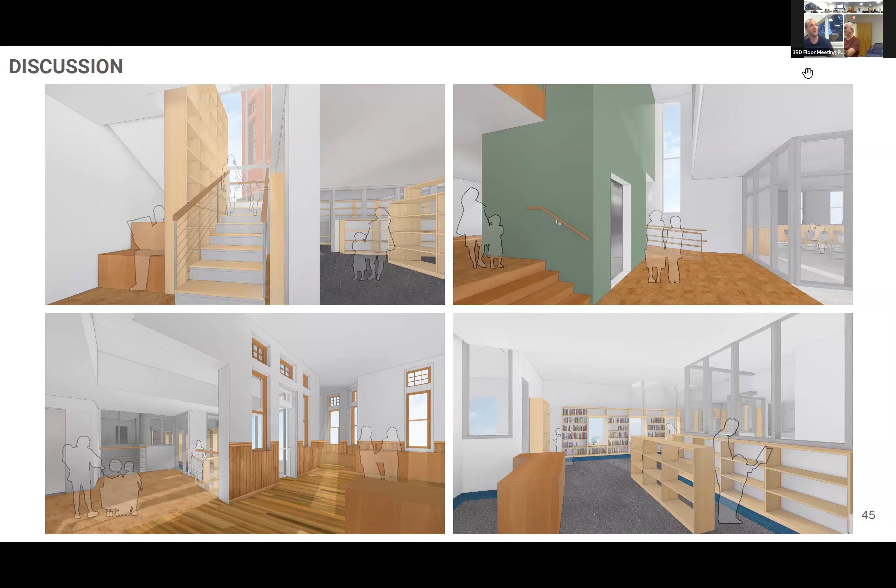Prepare yourself. We are in a challenging spot from a cost perspective. It's not, I think, uncommon to think aspirationally up to a certain point of design and then reach a point where you really need to start dialing it back. So we've had a couple pretty big changes in SD that have driven cost up substantially. So we'll review that here with you guys and then start thinking about these value management strategies, some of which we've already hinted at.

So we have, since the SD estimate, seen approximately a $1 million increase in the direct construction cost. We are at about 8.1 at schematic design, and we're about 9.2 right now. There are some substantial drivers to that, which we'll talk through, but you're getting a hint at it here with what you see on the right in those plus numbers. The building systems, the MEP FP number, has gone up dramatically for a couple reasons, not the least of which is the goal to go all electric. That was not carried in schematic design, and that is carried now, and that has impact on the mechanical system.

There have been refinements to the site improvements. There have been changes to the architectural components that have all driven the cost up. I'm going to come back to this slide in a second, John, to talk soft cost, but just to keep on what's changed. We've got here a summary of the key cost drivers. It's not all of them. There are others, but these are the biggest contributors.

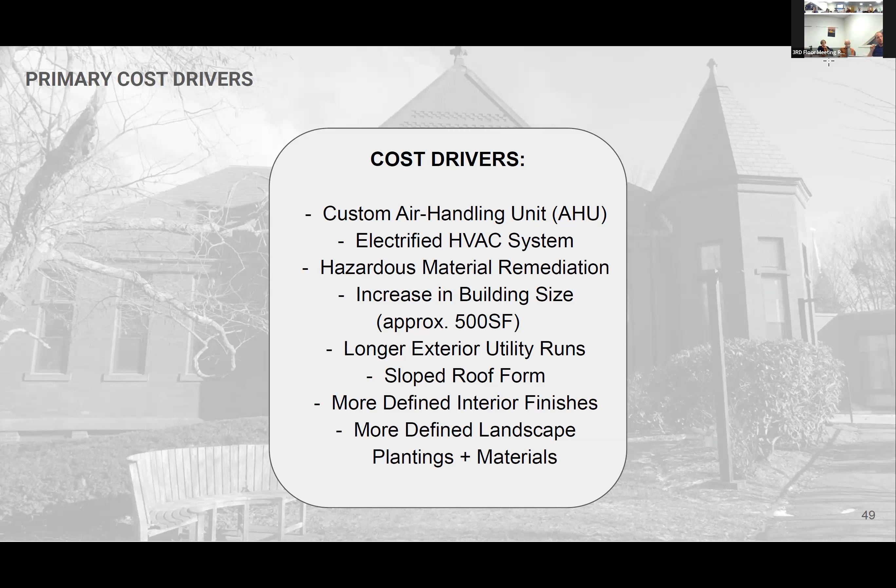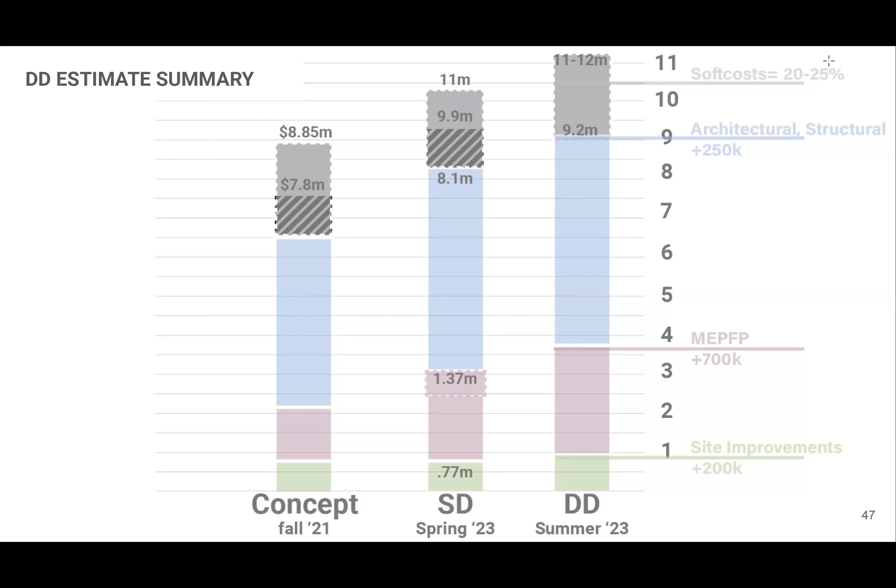I said this earlier in the process, but it's a good point to mention again: when that concept estimate was done in the fall of 2021, it projected escalation for construction start in spring of '23. So we are now, at best, going to be 9 months beyond that. So we have almost an additional year in escalation, which, you hear different numbers, is anywhere from 6 to potentially 9% per year. So, to Morgan's point earlier, what has driven us from where we were in '21 to where we are now, that is a big component of it. And that delta should go on that slide so that people have all the information. Absolutely, that's why I brought it up. It's really good to know. That's hundreds of thousands of dollars that we're absorbing, for lack of a better term, into our process to try to figure out how to account for.

Well, and I think what Morgan's proposing sounds really good, because even I, somebody on the building committee, am not totally clear all the time about exactly where money is going and how things are being attributed. And I think there is interest in the town in why this is happening, and they're just kind of not understanding where it's coming from.

And I think also if we could have a frequently asked questions, something easy that people can go to that's really easy to understand and they can see those comparisons. But also, what happens if we don't get a new library? Like you're saying 6 to 9% per year increase in costs.

They also need to know if this doesn't go through at town meeting, there are consequences to that, and there are very serious consequences. Lisa's saying she's not even sure if it'll last another 5 to 10 years. So I think all of that in something that's very easy to understand would be really helpful. Yeah, we can work together to prepare that.

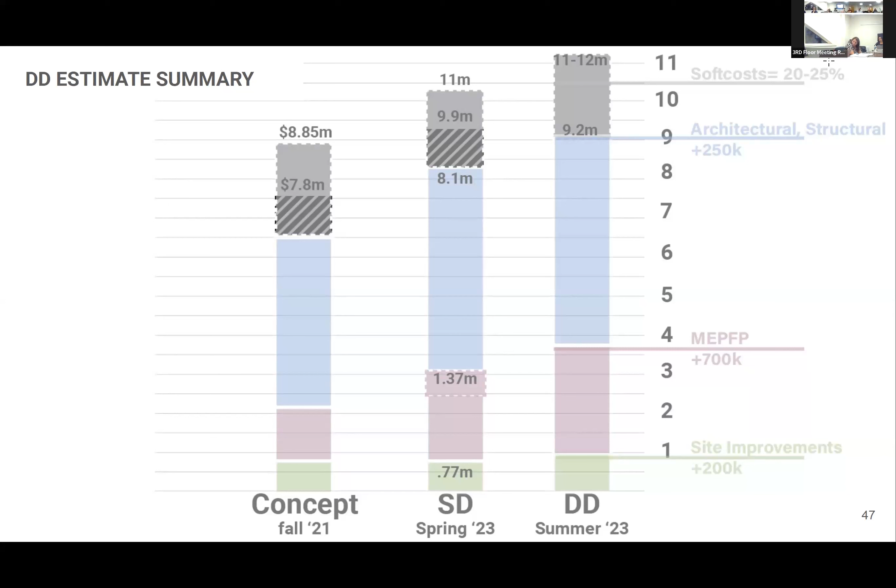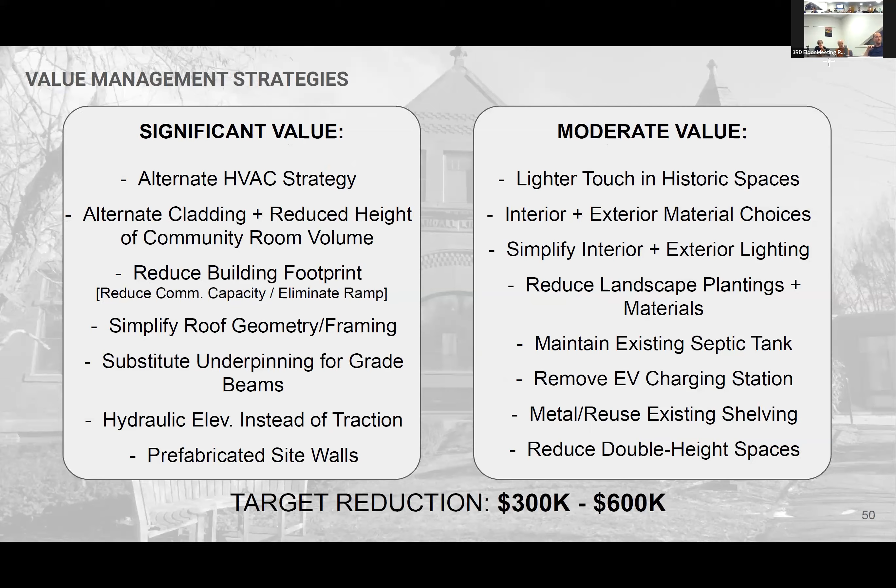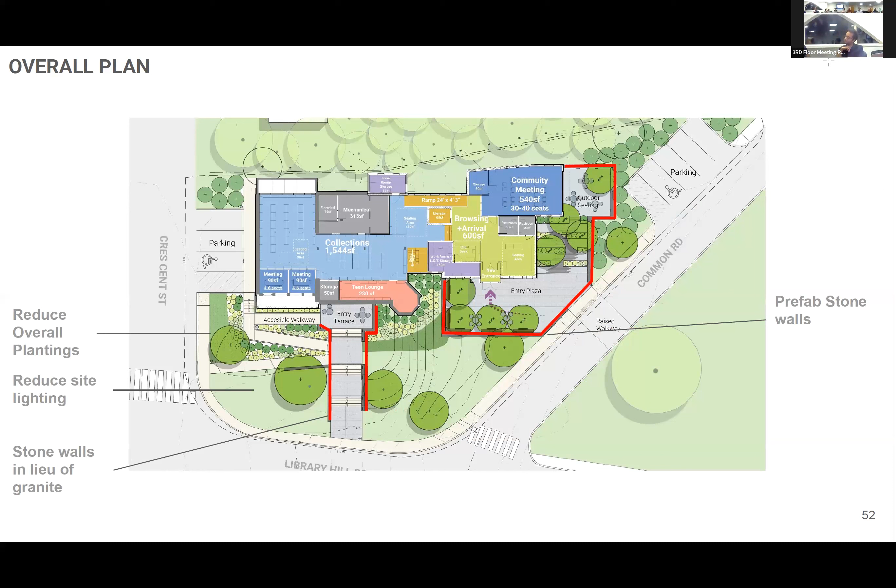Thank you. I'm curious about something. You mentioned that you had two estimators, your own and the outside, and that the numbers they came to were quite different, and you reconciled it. What did that consist of? Oh, well, hours and hours. It was a 4-hour meeting where we went line by line on both. But were there inaccuracies in one of them?

No, I mean, the estimator that I had hired on the town's behalf, this was their first look at the drawings. So I think that accounts for a lot of why they were a little on the high side. So part of the point of the reconciliation meeting is to make sure that between the design team, OPM, and both estimators, they have the most accurate understanding of the project that they can. So in some cases it's a communication issue.

Yeah, it's going back and forth and saying, well, what did you carry here? And is that the right quantity? And through the process of the meeting, you sort of sharpen the pencils and come to the most accurate number that you can. Okay. Thank you.

One last thing to talk about, if that's okay, to switch gears. Please, do. It's yet another challenge in our process. I don't know that we ever said building was easy, but this is particularly challenging. Sorry, we already went over this, but the transformer. Because we're increasing the electrical demand on the building, independent of whether or not we go 100% electric, we need a new transformer to supply the building.

And we have heard, I think we alluded to this in past meetings, that the local utility company was putting forward some really extended lead times of up to 4 years to get a new transformer. They have since confirmed that, sticking to their guns, that is the lead time they are contending with. So obviously that's kind of a non-starter, because we'd have to wait 4 years before we can get electrical service in the building. It just impacts so much more. So it's a big issue that we need to figure out, and I say we collectively, meaning the town and the building committee.

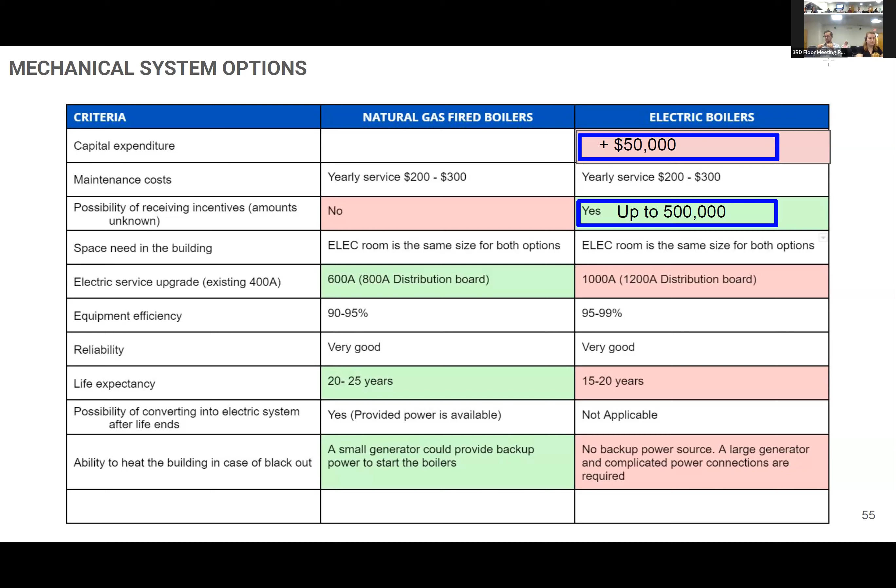Here's just looking back at the schedule that we highlighted at the top of the meeting. These are our upcoming meetings and milestones. ZBA is in a couple of weeks on the 10th. We are proposing that additional workshop 6.1, as we're calling it here, on Wednesday evening, the 12th. And the primary purpose of that will be to talk through all the value management strategies with more detail. And then coming out of that meeting, getting to consensus amongst all of us on how it is we're reducing the cost and what it is we're pulling from the scope.

We then would update all of our documents to reflect that, and also provide further detail to everything to go to our 50% CD estimate. Friday, August 11th is what we're targeting. So that gives us not quite 4 weeks to get all of that updated and incorporated and developed. And then we have another three-week estimating period. You can see it there. That takes us to the end of August. And then a workshop in early September to review those costs. So that's to stick with the timeline that we already have in place. That's not extending anything. That's working with the milestones that we've already established.

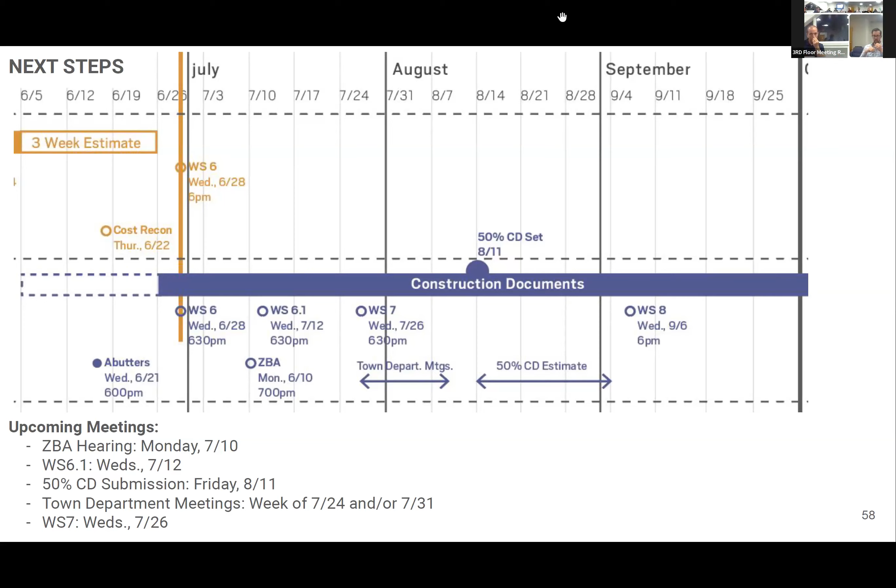Great, thank you. We'll move on to John and your report. Well, okay, so the one item I had to bring to the committee goes under the topic of soft costs, and more specifically adding soft costs potentially to the project, which is maybe a sore subject right now. But as we're marching towards the construction documents phase of the project, we typically recommend that we hire a commissioning agent. I had mentioned this at the last meeting.

A commissioning agent would be a third-party engineering firm that would be representing the owner and contracted with the town. And they would be doing testing and verification of the mechanical, electrical and plumbing systems of the new building, basically to make sure that they're functioning as the design was intended. So we recommend this on every project. And because of that, I advertised and solicited proposals for commissioning agents this past month. I received a total, I think, of 8, which is a pretty good turnout for proposals for commissioning agents for a project like this.

And so I'll start by saying that all of the firms that submitted proposals to us for commissioning services are all qualified. They're all known entities in the market, and I don't have any concerns with any of them. So I was looking specifically at the proposed fees in their proposals. And I've included this in the packet, in the monthly report.

I'm not sure if you had a chance to look at it, but the lowest proposal was from BVH Integrated Systems. They're an engineering firm based out of Connecticut. I asked the question, if you guys are out of Connecticut, can you come up to Stow and service this project easily? I actually called them to ask. I know BVH because we've worked with them on other projects. I just wanted to make sure there's not a geographical issue, because they came in at a relatively low fee. They said no, they've got people up in this area that can very easily service the project.